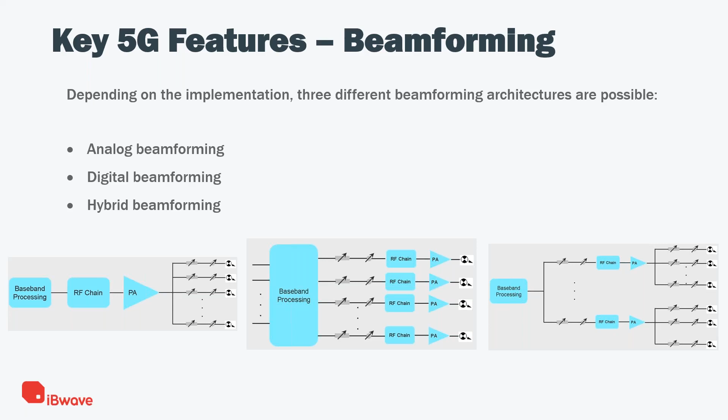Depending on the implementation, we can have three different beamforming architectures: analog beamforming, digital beamforming, and hybrid beamforming. A very popular antenna array configuration is the uniform rectangular antenna array, where the antenna elements are placed on orthogonal axes, forming a rectangular shape. This type of antenna geometry is characterized by the number of elements in the horizontal and the vertical axis.

Here we have two examples. One 8 by 8 antenna array that will have a total of 64 antenna elements, and another one, a 16x16 antenna array, would have a total of 256 antenna elements. This antenna array geometry, depending on the sector that we want to cover, can have a different angle of coverage in the horizontal beam. So depending on the sector angle, we can have different arrays.

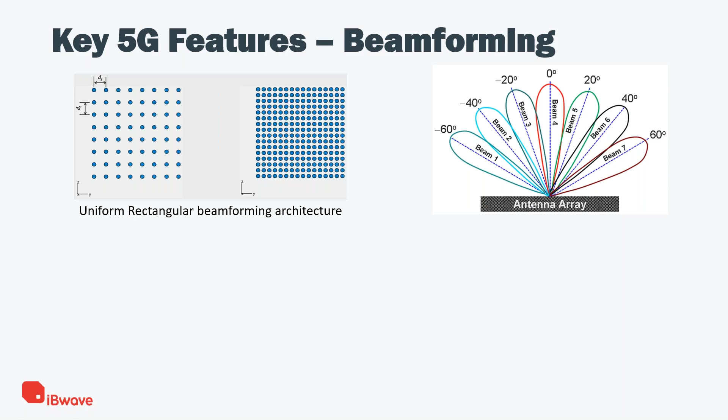The support of beamforming in 5G requires the ability to distinguish between different beams, right? So if you have a user equipment, the user equipment should be able to receive different beams and select the best beam for data transmission or for control channel information. This kind of support is possible through the special design of SS/PBCH blocks, physical resource.

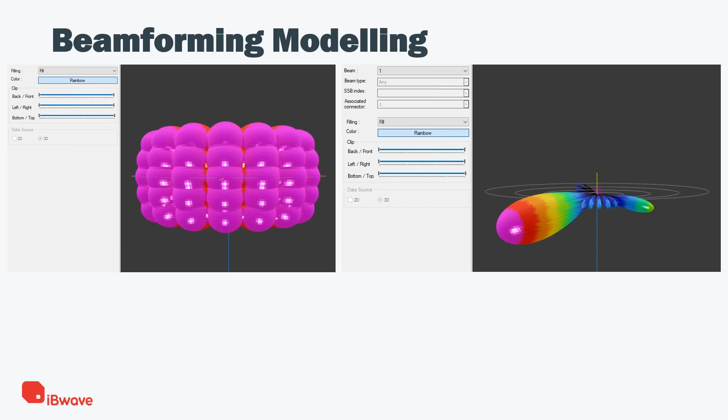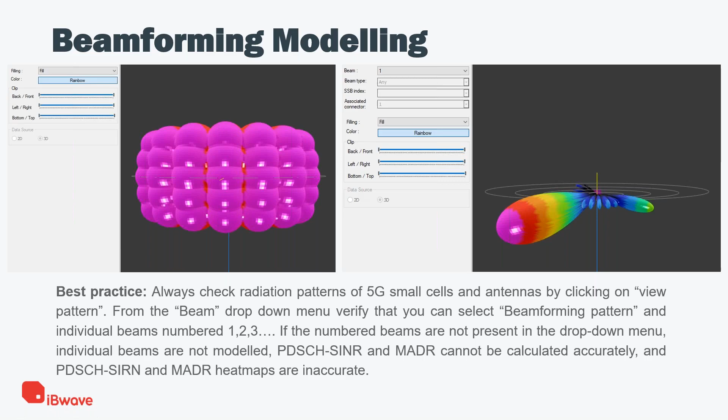So pay attention here. You can always check radiation patterns in your 5G small cells and antennas. Just click on view patterns, and in the beam type drop-down menu you can verify whether you are looking at the beamforming pattern or at individual beams. You need to make sure that you have both, because especially for PDSCH SINR and maximum achievable data rate, if you don't have the individual beams modeled, the PDSCH SINR and maximum achievable heat maps will be inaccurate calculations, okay?

And finally, for millimeter wave building modeling, we need to pay attention because we have a huge difference in propagation comparing sub-6 gigahertz and millimeter wave propagation heat maps, especially for reflection. For example, at 30 gigahertz the wavelength is only 1 centimeter, so most objects in your layout are much larger than the wavelength. This implies that you have a lot of reflections, so it's very important to pay attention with millimeter waves.

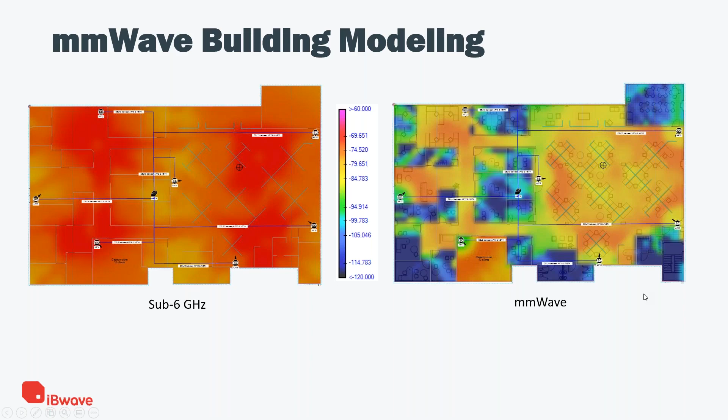So for millimeter waves we recommend building modeling as detailed as possible, including large whiteboards, mirrors, and flat screen TVs, because those objects reflect the signal, much more at millimeter wave frequencies. As you know, in iBwave Design we have all materials already ready for millimeter waves, with all parameters for losses, reflection and diffraction to be used in our fast ray tracing propagation model.

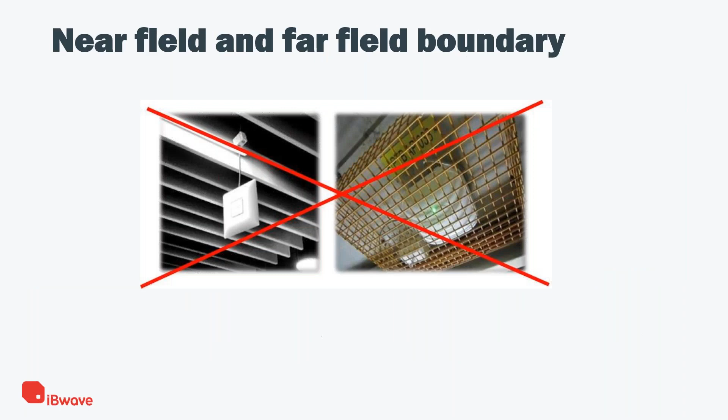Now, the last one is the near field and far field boundary. This is just to make sure that you determine your Fraunhofer distance and pick antenna locations so that you don't have reflective objects within that distance. So avoid installing the antennas near reflective objects.

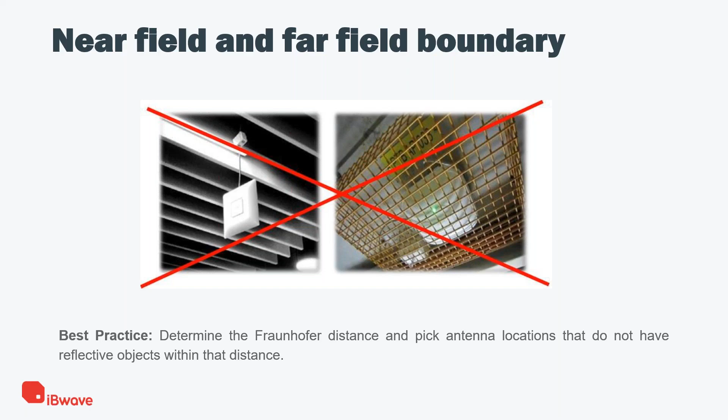Oops, sorry. Now I will leave Ricardo to present the use case to us.

Ricardo, you are mute. Okay, thank you, Milton. Just set things up here.

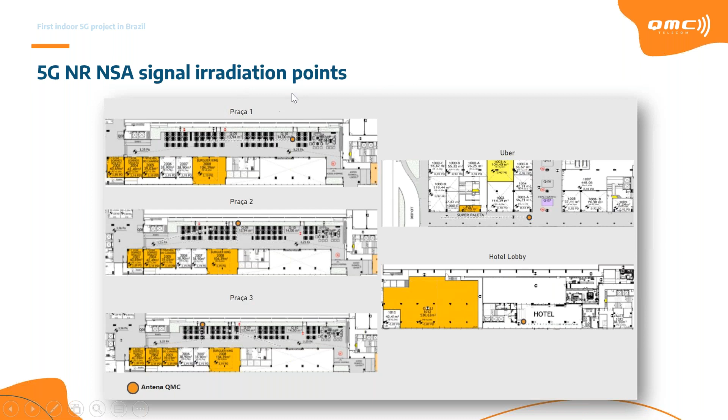Let's call it a restaurant, but it's not a commercial restaurant. It's just for the employees of the airport. So we also want to check this one. Okay? So with these three locations, we were able to collect a lot of data to support our findings, our expectations. So this is the antenna.

The solution we are using is a full, let's call it fiber to the antenna, fiber to the edge. In the entire solution, we only use RF cables in the POI interface, only the head end. All the other distribution units are done through fiber. And in this box, we have 8 amplifiers with 8 integrated antennas. So we are able to perform here an 8x8 MIMO scheme for 2 operators.

So we have a high capacity link here on the fiber. We can process simultaneously 1200 megahertz of bandwidth on this little box. If we need more, we can just run another fiber to each of them. Okay. So this is just the general architecture of the system. We still need the signal source from the operator.

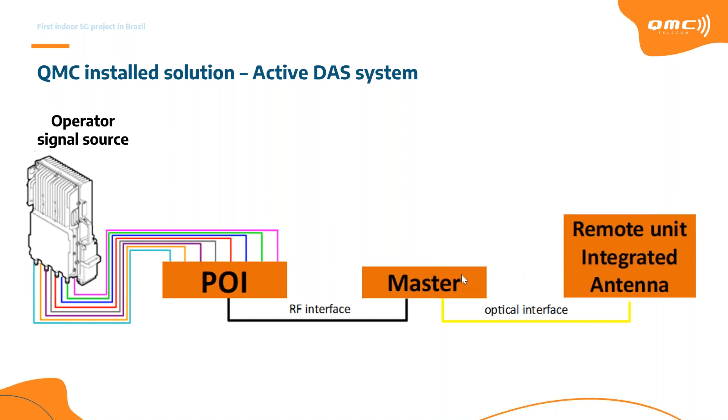At this trial, the operator was using Huawei equipment. So this RRU delivers 8x8 MIMO. So we connect this to the POI, and we just have a jumper to the master unit. And in the master unit, we quantize and digitize the signal, and then we transport this through the optical interface to the remote units.

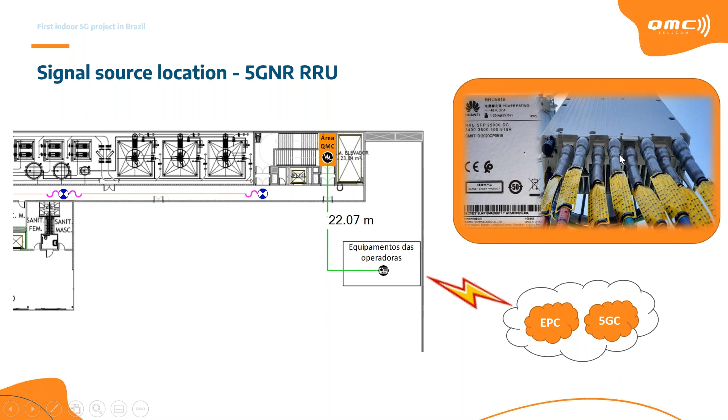And our equipment area, where we have the DAS head end, is a little far from the operator's equipment. We are around 20 meters. And this is the model that Huawei deployed here on the site. And then we had to run the 8 cables to our head end.

Now, to support this installation, we had a training. All the technical guys that were part of this trial received training from Rohde & Schwarz. They provided us with their scanner to take the measurements. Let's recall that we are talking about an airport. At the time we were starting this trial, we started to see some movements in the US.

We always look to the US market as a reference, and there were those discussions about 3.5, the 5G in the airport area, about the radio altimeter of the airplane. So we had this concern. So with this equipment, we could monitor the spectrum to see if we could get any interference signal, or if we were generating any interference signal in the airport operations.

So here we have this spectrum analyzer to monitor all the spectrum. We also were able to connect our test equipment to this spectrum analyzer, so we could decode all the layer 3 messaging to better understand the states of the user equipment, when it's connected, what's the attach time, all those parameters, and what we could work on as an optimization parameter. I will talk later on about some of these findings.

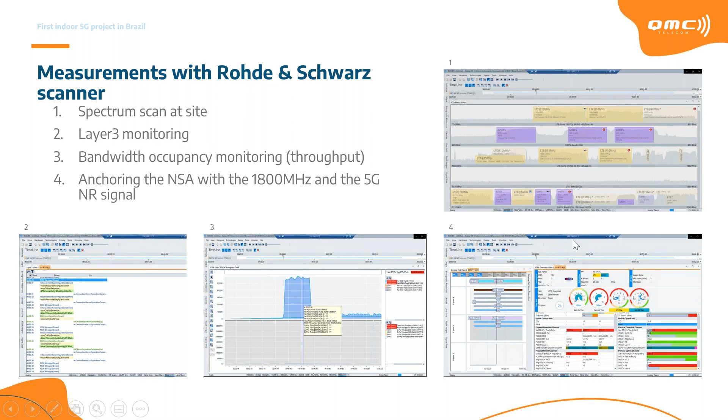Okay? And we also had a board where we could see in real time all the measurements that were being taken, throughput. One of the things that we learned, for example, we're talking about indoor. We have an 8x8 site, so we started the configuration with 8 beams, and this generated a lot of interference between the beam IDs. So we had to step back and configure just 4 beam IDs, and this looked to be the most optimal configuration for indoor deployment.

Another thing that we saw is the power consumption. At the beginning, just when we commissioned the site and started the first tests, we were trying on a SISO system, just one antenna port activated. And as soon as we started to run some data through the system, the site would shut down and come back up again very fast. So we were concerned this was some kind of commissioning problem, some kind of parameter problem, but in the end it was an energy problem. So we had to add another rectifier to be able to support all the power consumption of the site.

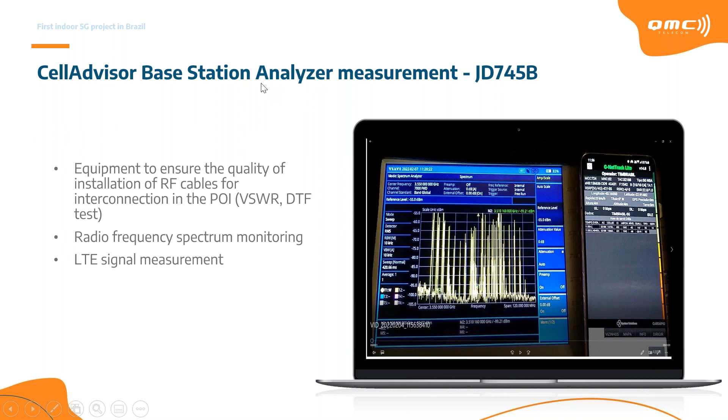So we work a lot with VIAVI. We have this base station analyzer, not for 5G. Here we were just checking the spectrum, to see if we could check their interference. But we use a lot of these equipments to run the cables and make sure the connectors are done properly. We also have a fiber microscope integrated with the solution, so we could check the fibers for any problem, to see if the nucleus is all clean. So we had all this set up to test.

Also with Keysight Nemo Solutions, we had a Z3 phone to perform all the data collection, and we use this data to feed back into the propagation model, so we could calibrate it. The results are very different when you consider the US market, Canada or other countries; we have construction differences even between the same kind of material. For example, drywall in Brazil is different from drywall in the US, and from drywall in Mexico. So our technical team is always collecting this data and feeding it back to iBwave to have the most accurate predictions possible. So we were very well prepared here.

Another thing we wanted to check is the new state in 5G, the inactive state. In 4G and 3G, we have two states of the mobile phone: idle and active. Here we have a new one, inactive, and we want to see what happens when the user equipment changes from inactive to active. How long does it take? Is the data transparent enough to not show any impact on performance? We were very happy with the results.

So this is the site in question. As I mentioned, it's next to the airport. Here's the Santos Dumont Airport, a domestic airport in Rio de Janeiro. This is one of the most iconic locations in Rio de Janeiro. It's very beautiful, and it's very busy also.

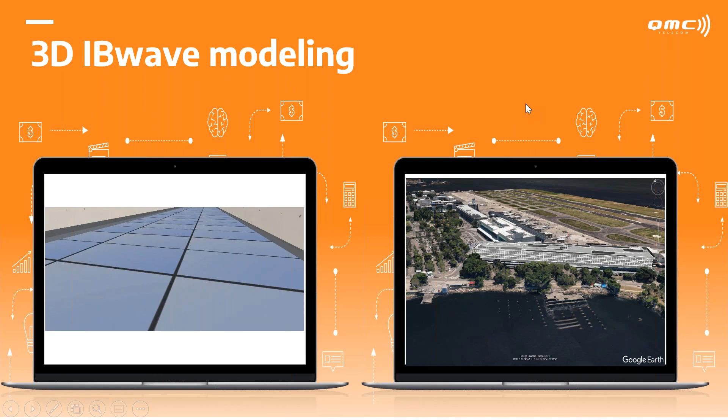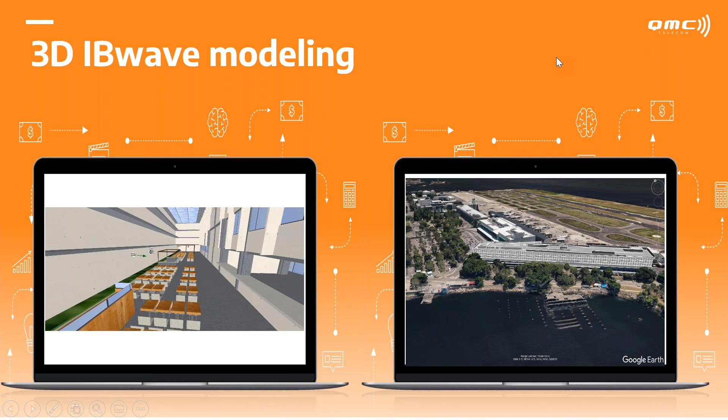This is the entry point for the city of Rio de Janeiro, and we always had a concern. When we are running a design, we need to be very thorough in the details and how we're going to model the system to support our projects. This concern comes from not wanting to over design or under design the solution. What we always aim for at QMC is the best TCO solution possible for the operators. This is one of our visions: enable connectivity and resolve client needs. Whatever solution we need to deploy, we are able to run it.

Another curiosity here. Remember when I said the operator's equipment was far away from our head end? The operator equipment is around here, at this location, and here we have a set of antennas also covering the airport. This airport is protected by a government agency that protects historical buildings. So it cannot have any outdoor installation, you cannot have any visual impact. So we do all the coverage inside the airport from this location.

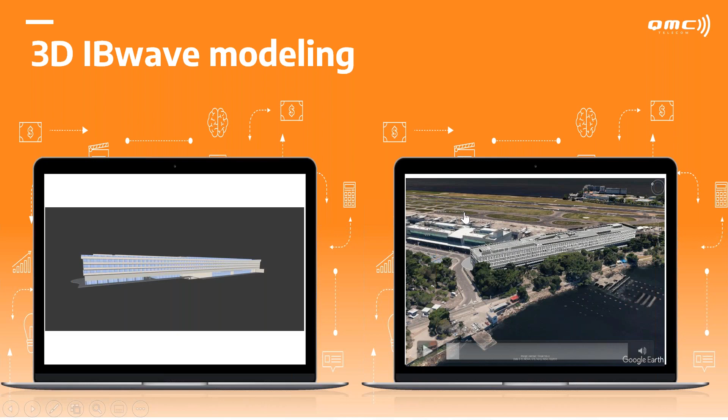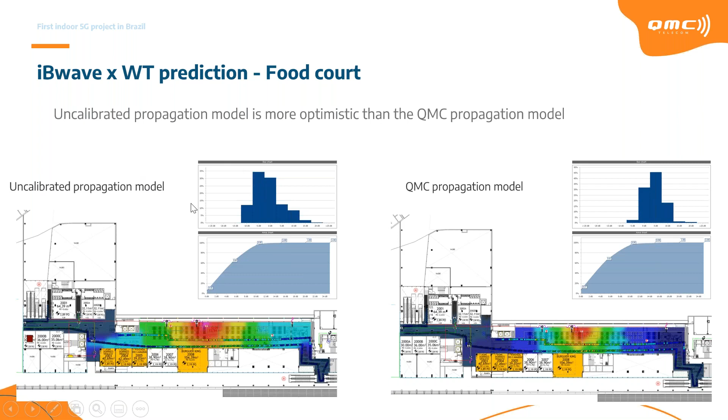Here was one of the main results: to collect this data and see what the result of our propagation model was. Are we accurate enough? So we started the evaluation. Before, we had done a calibration of the materials. We collected these materials from the internet, some research, from another entity here in Brazil that has studied RF signal propagation, and from several books, such as the brick penetration loss for 3.5, and we did a previous calibration, but you can see the results were not what we expected.

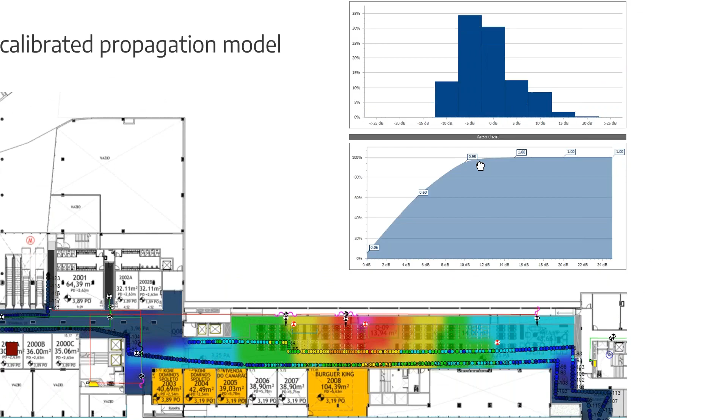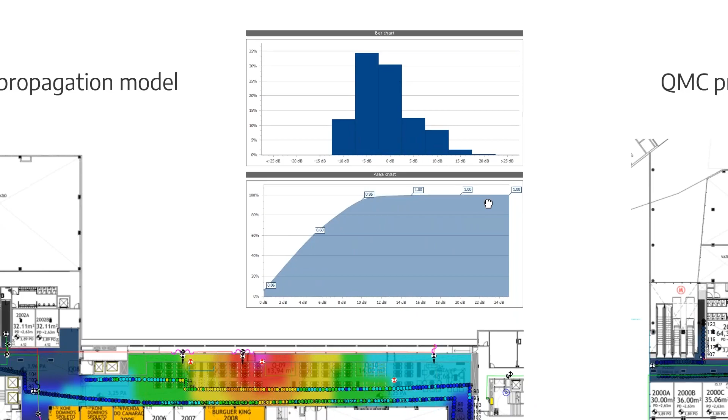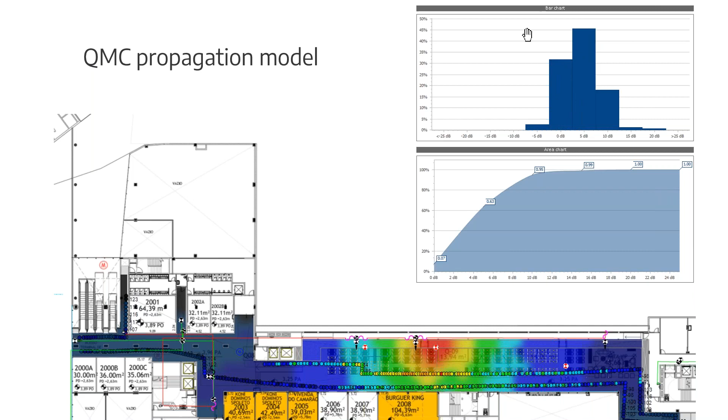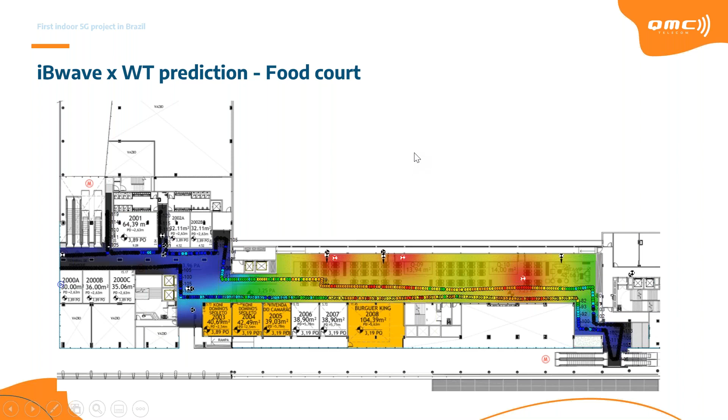So I said, okay, we are on the right path, but we still need to calibrate more. We can see that the distribution of our samples is very spread between -10 dB and 10 dB, which is bad considering we are dimensioning a solution. So we kept collecting data and feeding back the propagation model until we reached what we considered more feasible. Then most of the samples are between 0 and 5 dB, which gives very good results. The idea is to have the propagation model well calibrated so we can have pinpoint dimensioning. We are not over designed, or, which is worse, under designed for this kind of project.

Now we have this data for very dense area like the food court I was mentioning, how the body loss will affect the prediction, how the body loss will affect the collection of data, how the body loss will affect the propagation of the signal, all the obstructions that we have on this dense area. So now QMC has this data to support this challenge.

We know if we are in an open area, what kind of adjustment we need to do on the prediction. If we are talking about a hotel lobby or a shopping mall, how we can adjust the prediction to have the better result. And all these lead us to be able to provide the best TCO possible for the operator. So here's just a sample of the results.

The system was built to support 4 operators in the neutral host environment. Of course, we cannot support 4 operators with just one radiation point. If we need to support 4 with MIMO 8x8, we would need 2. But for MIMO 4x4, we can support all the 4 operators. So in Brazil, we have 4 operators now that won the auction, and each one of them has 100 megahertz bandwidth available in 3.5. So in this configuration, we are working with one operator that's active on the system, and we can see these results.